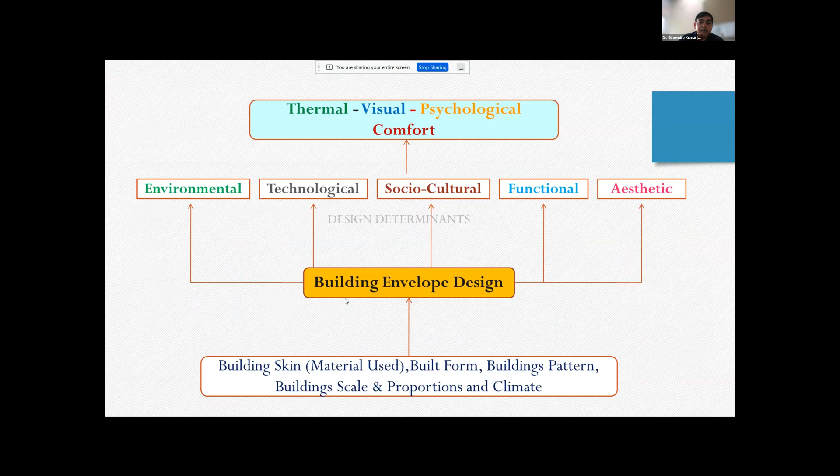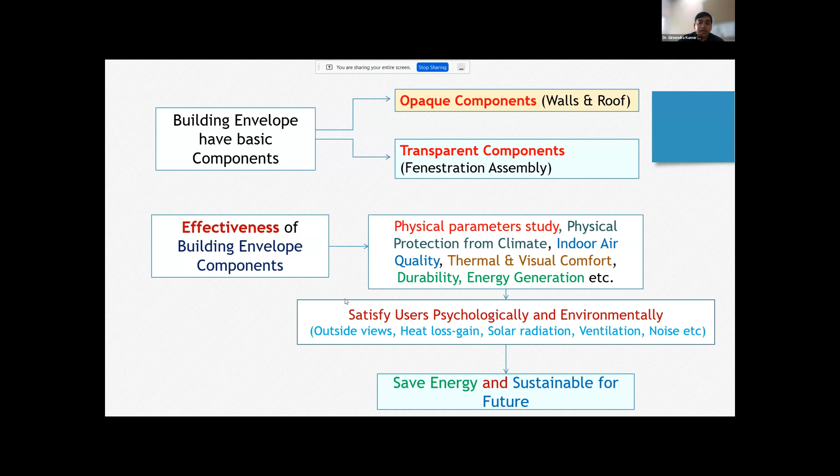And the role of opaque and transparent components is very important. We need to understand their independent roles, the different materials we are using and their physical properties, so that we can create a safe and comfortable space which can be sustainable for the long future. Through designing the building envelope, we are maximizing daylight, controlling glare, controlling heat gain and heat loss, and also providing ventilation and outside views.

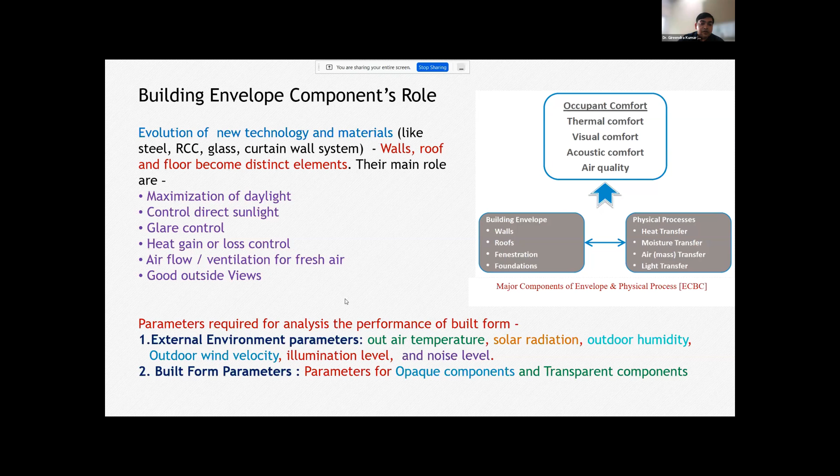So these are the environmental external parameters we need to consider when designing the building envelope, so that we know the requirement as per the climate context: whether ventilation is required or not, what the temperature variation is, so we can selectively pick the suitable material. These are the detailed properties of the opaque and transparent components of the building envelope we need to consider.

So these are the physical properties we need to understand. For the opaque component, how the conduction process will happen. If we are selecting a brick wall or a fly ash brick wall, or any other material used as cladding on a brick wall, how the performance will vary, how the heat gain and heat loss will vary.

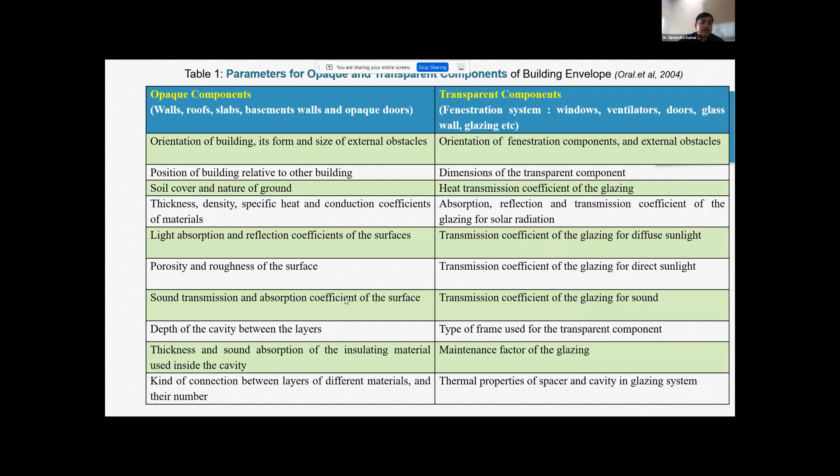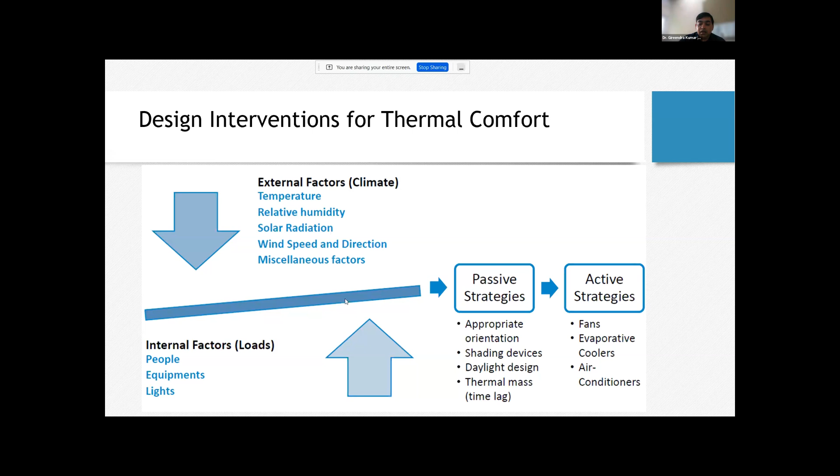So through simulations we can check all these things before starting the construction of any design. So it is very much required, along with some interventions through passive strategies and active strategies. So by providing shading devices, assessing the thermal mass, appropriate orientation; then if we are not able to achieve comfort, our active measures can work on it, like fans, evaporative cooling, air conditioning. All these things can be utilized as per the requirement, but we need to optimize so that we can achieve the maximum sustainability and energy efficiency in the building.

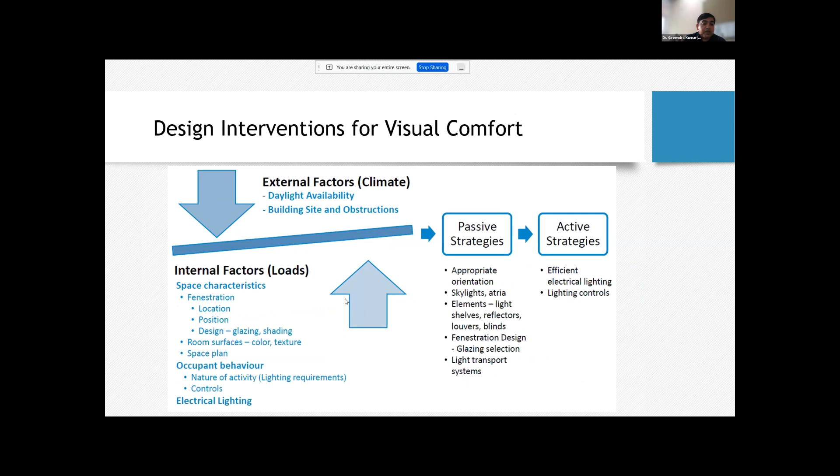Similarly for visual comfort, we need to see how we can harvest the maximum daylight while simultaneously reducing the solar heat gain coefficient. So we need to take care of all these interventions when we are designing the fenestrations, their location, designs, type of glazings. And in parallel we check the cost, because the client or the stakeholders may have some kind of limitation on it. So we need to pick the optimum solutions for these things.

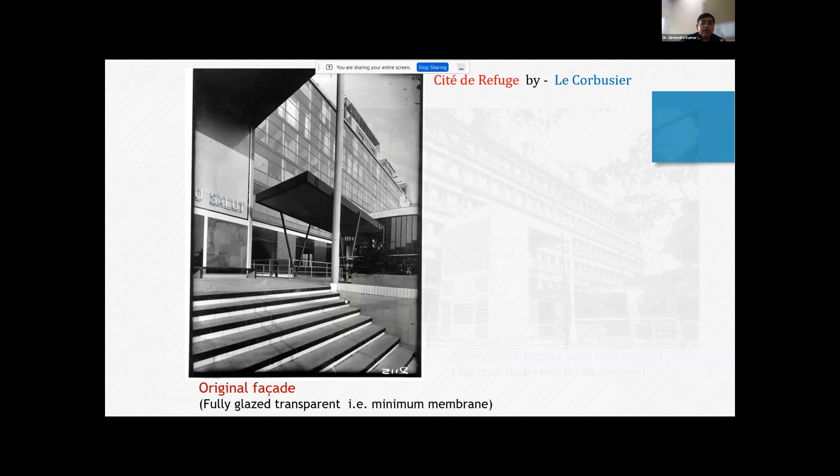Like this is a building designed by Le Corbusier, which was initially designed without any shading devices, and the users, the trainees who are working in it, were facing a lot of direct solar radiation issues. So this whole building was redesigned, the facade was redesigned, and an egg-crate shade was implemented so as to give some kind of mutual shading on the openings and try to resolve that issue. So this is just an example of how we can retrofit our existing buildings and see the impact of climate on the building.

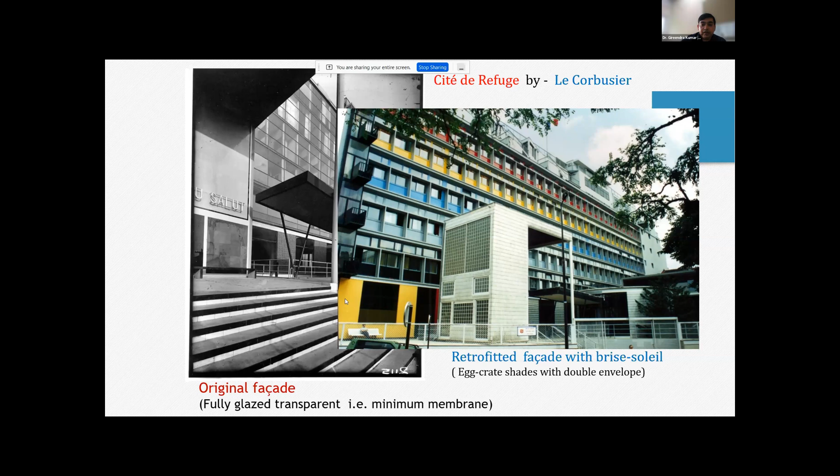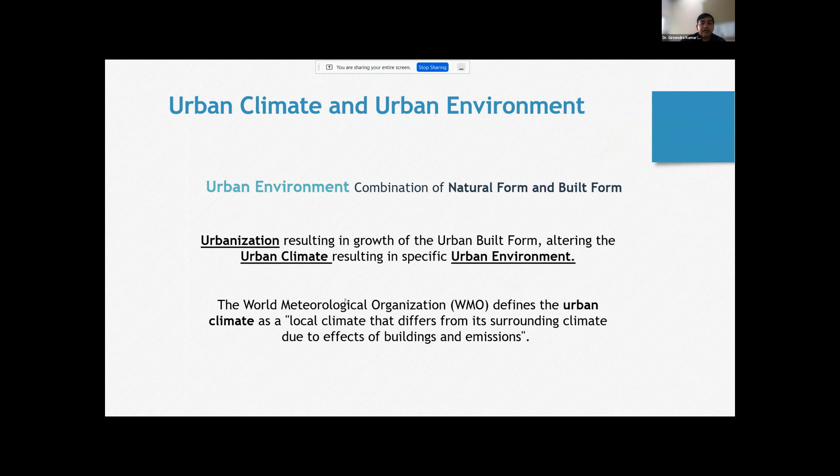There are some impacts on the outdoors also, like we have building neighborhoods and cumulatively all the building blocks are being constructed, and all the individual architects are focusing on the client requirement. They are not looking at the outside. How the view looks is one part, but how it is impacting the surrounding climate is also very important. So these are the issues we are facing, like urban heat. Our local climate is getting impacted because we are using air conditioning; the amount of heat rejection through air conditioning systems is impacting this.

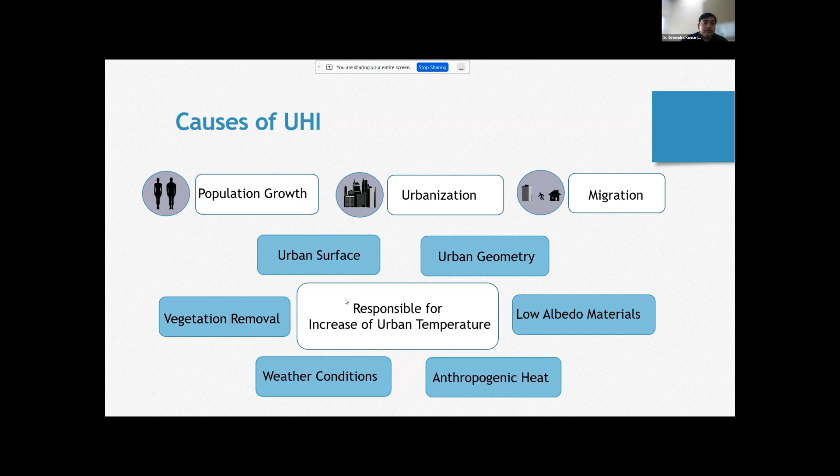So how can we use it? Urban surface, urban geometry, low albedo materials, weather conditions, anthropogenic heat, vegetation. All these things we need to reconsider when we are designing the building envelope. So how can we use these kinds of things? We have technology like remote sensing, automatic weather stations, field studies, and modeling through which we can analyze the design of the building envelope on the site and how it is going to impact the environment cumulatively. Based on this, we can have different cycles through which we can do these kinds of measurement analysis.

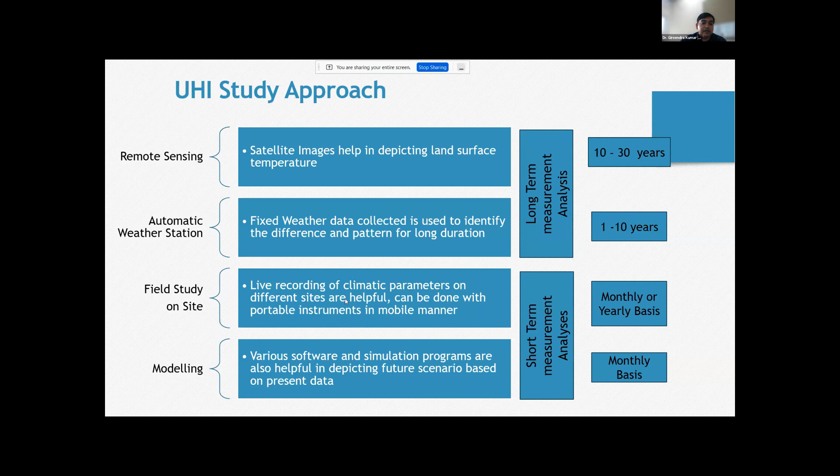I am already working with instruments which we can use to observe these kinds of things. So we have data loggers, automatic weather stations. We can use GIS. We can use remote sensing technologies to analyze land surface temperatures, through which we can analyze how much the design interventions need to be revised, and how we can propose development regulations and bylaws for the cities.

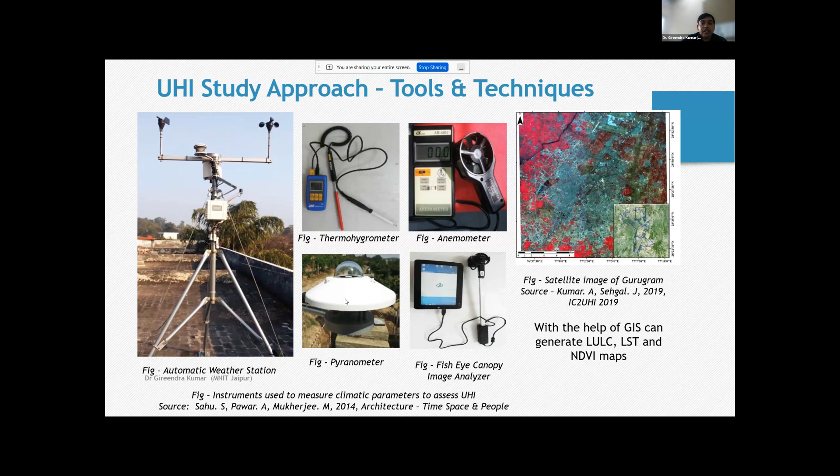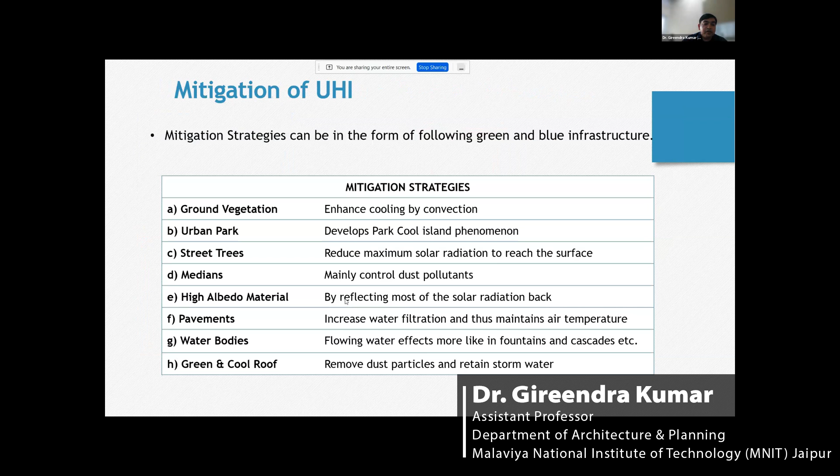So normal or common bylaws cannot work for whole cities. We need to be very specific to the local region also. So how we can increase the setback, what are the heights, what is the selection of material. Based on contextual studies, we can propose that. So these are some strategies along with the infrastructure or the design. These are some more strategies which can be integrated with the building envelopes, like surrounding vegetation, urban parks, streets, medians, high albedo materials, pavements, water bodies, green and cool roofs. All these are going to help.